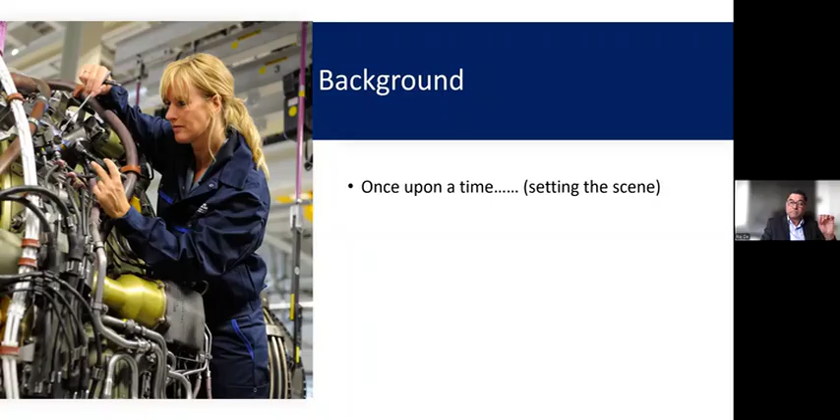The investigation found that as part of the maintenance, the engine borescope plugs were opened during the overnight maintenance activities. But post-maintenance, one of the plugs was not installed back and the other only partly installed. The borescope plugs are removed during, as some of you would know, some maintenance to inspect the internal parts of the engine as part of the engine health monitoring. The fitment of the borescope plug is certified not only by the engineer who has fitted it, but also by another engineer who is expected to do an independent inspection and then sign the certificate.

Now, here is the critical point. This task required an installation, an independent inspection, and a certification. All three occurred, yet the error still passed through the system. As a consequence, hot gases leaked during flight, causing heavy damage to the engine parts, causing significant disruption and thousands of pounds in repair of the damaged parts. So we must ask, did the risk control fail here? Or did the system fail to detect the failure of the risk control?

The subsequent investigation employed the HFACS and the MEDA taxonomies, but could not establish accurately the contributory factors for the human error. The conclusion was distraction of the engineers, and to address that, the MRO issued a high-vis jacket to all engineers that had a statement on the back, "Do not disturb, critical task in progress." This high-vis jacket was meant to be worn whenever an engineer is carrying out a critical task. Now, theoretically, this appeared to be a very good solution.

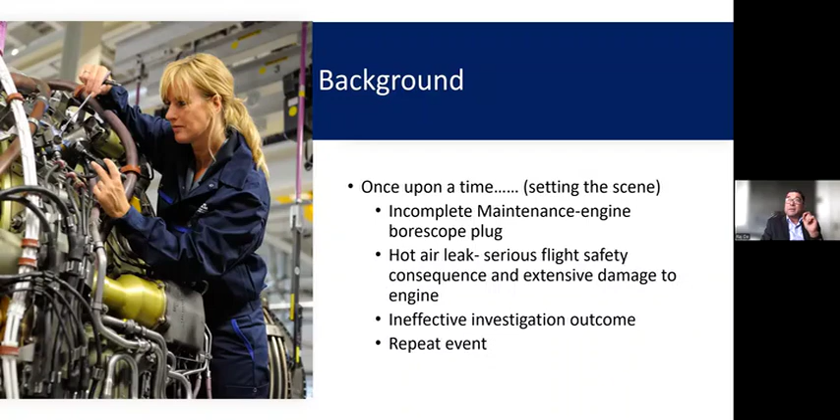The objective of this research was therefore threefold: trying to understand what are the causal factors for aircraft maintenance errors, how do organizational factors influence the effectiveness of the risk controls, and thirdly, in relation to the critical tasks, trying to find out how the risk controls can be made more effective. Importantly, not just identifying errors, but understanding why controls that should work don't always work in reality.

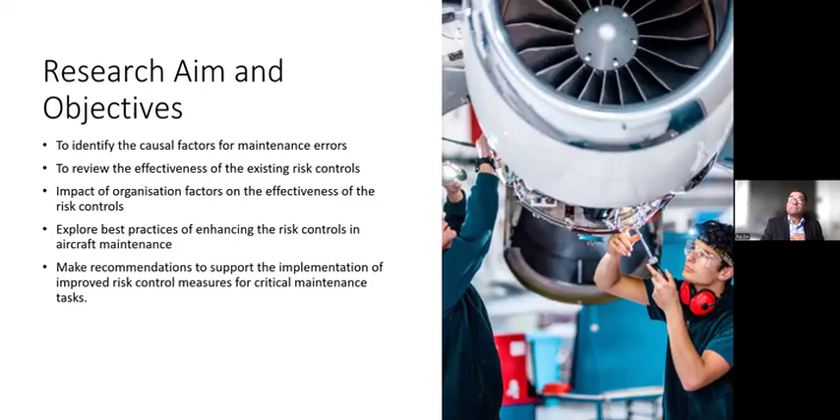To recap, the problem statements are as follows. I gave you one example, but there have been multiple events related to maintenance errors around critical tasks. I've seen key investigations which on one hand would be very limited. We all probably have heard the statement at the end of an investigation, the engineer was reminded about the duties and responsibilities. And on the other hand, the investigations remain inconclusive due to lack of information on what contributed towards a human error. This is due to memory fade. So investigations often are either too simplistic or inconclusive because of memory fade.

Now, maintenance errors are in this respect very unique because they often remain latent. They are only discovered later. In relation to critical tasks, we carry out hundreds of independent inspections throughout the year, but have very limited, if any, feedback on how effective these inspections are in error capture. On the other hand, there are very few useful mechanisms employed in organizations for identifying weaknesses in skills, and consequently, the continuation training structures in most organizations have very limited usefulness in enhancing the skills. Most of these continuation trainings are focused on enhancing knowledge, but not necessarily the skill behaviors or error patterns.

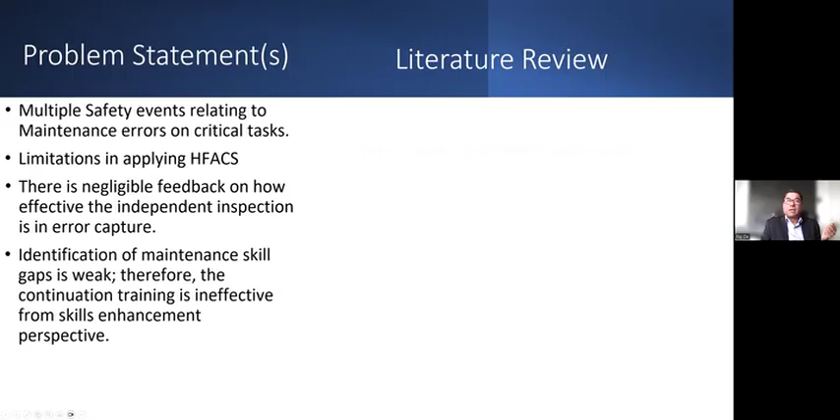My literature review for the research was focused on topics related to critical tasks in aircraft maintenance, regulatory framework, human factors contributors to maintenance errors, review of key safety investigations, error taxonomies in maintenance, risk controls in maintenance, organizational influence on risk control enhancement, integration of technological tools, lessons from flight data monitoring implementation, and also system perspective theories. So to recap from the example we have discussed, risk controls are in place, but we do not have any proactive feedback whether they actually work.

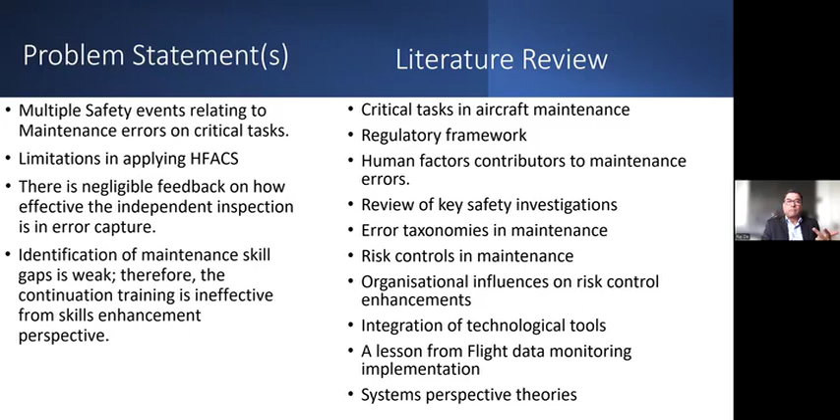The method was a multi-layered approach based on qualitative research. The data collection was interview-based with the logic of gathering richer information. The interview participants were selected keeping in view a good mix. Almost 50% were engineers with varying experience, and the remaining were a mix of managers and leaders of the company. Now, the question arises, why qualitative analysis? It was considered that human factors are quite complex in nature, and maintenance related issues are quite context driven. So they are not always measurable quantitatively.

The interview structure was broadly based on three themes. One was the causal factors of maintenance errors. The second was the influence of organizational factors on the risk controls. And thirdly, the views on present risk controls, their weaknesses, and recommendations for the future. NVivo software was used to help carry out thematic analysis, as it enables extracting data from different sources like interviews, audio and video files, helps construct codes and themes, and presents the output quite visually. In short, the thematic analysis allowed pattern recognition and revealed hidden relationships.

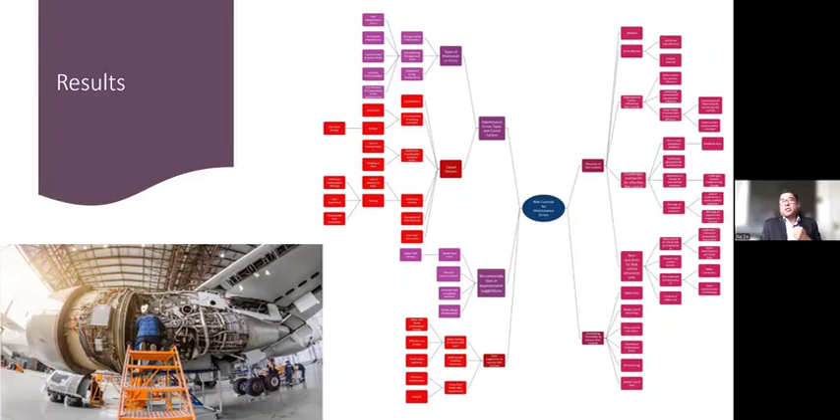Now this slide tries to summarize some of the key results from the research. Complacency figures high on the list at 33%, but other key observations were ineffective training, communications, and night shift timings. Notice that complacency is not negligence, it is a normalization of a routine. So a key message from this slide is that risk increases when tasks are repetitive in nature and errors may have no immediate consequence in the maintenance world, as in the topic we are discussing now.

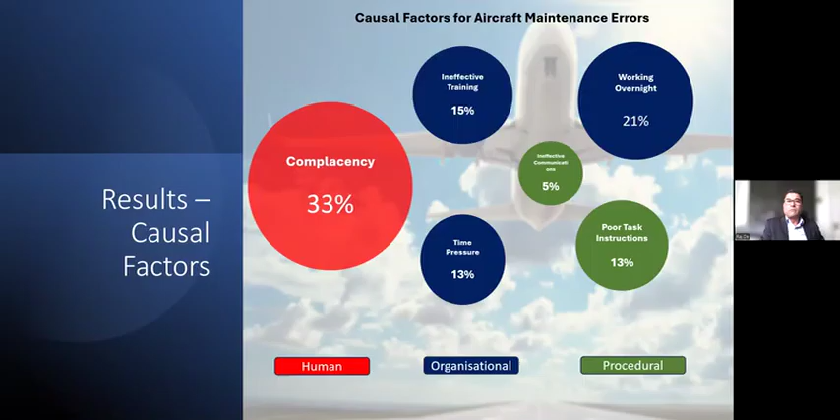So whereas mitigations like recruitment through the apprenticeship schemes have started to yield good results, the time to gain skill maturity is difficult to expedite. There is no shortcut to getting experience in a very short period of time. Along with the above, there is the issue of resistance to change. This factor affects the adoption of new technology.

So if you imagine we have people with greater experience of, let's say, 40 years doing this work, and on the other hand we have freshers who are trained, who have gone through the courses and the licensing system, with quite a young age profile. So there are different acceptance factors in relation to new technology.

In the previous slide, some causal factors mentioned were complacency, time pressure, and night shift duty times. Therefore, a key observation in the study was the over-reliance in some cases on another engineer's work, which could result in tasks getting certified without completion to their intent. In short, there is an assumed assurance: if it is signed, it must have been done, as was the case in the borescope plug example. Therefore, the observation was the possibility of a feedback error and the weakness of the error capture method of independent inspection.

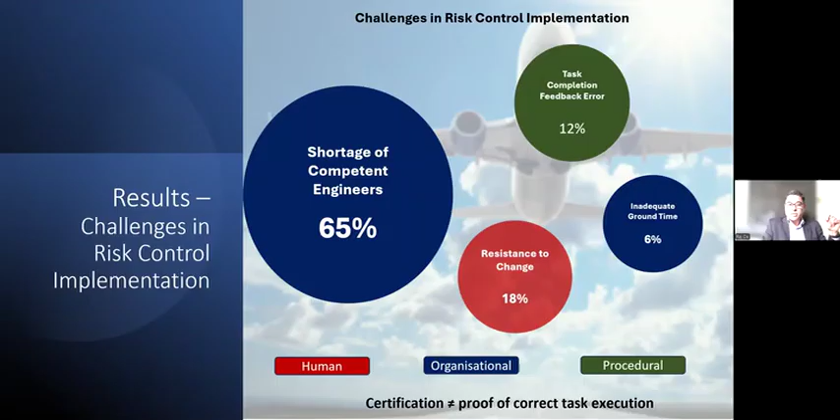So the research found similarities with some of the existing studies, like the types and causal factors for maintenance errors. It also observed the value added by the HFACS model, which has been derived from the Swiss cheese model, in understanding organizational factors. The model was also successfully applied for investigation in most of the operationally linked safety events. However, my study observed a fundamental weakness in the practical applicability of the model related to maintenance errors.

These errors are seldom detected at the point when the error is made. Rather, they come to light as a result of a flight safety incident or during a subsequent maintenance check. Due to memory fade, investigations are very seldom able to establish the actual reasons for unsafe acts. A key limitation identified, therefore, with traditional model applications such as HFACS is the reliance on retrospective identification of unsafe acts, which is particularly challenging in maintenance due to memory fade and delayed error detection.

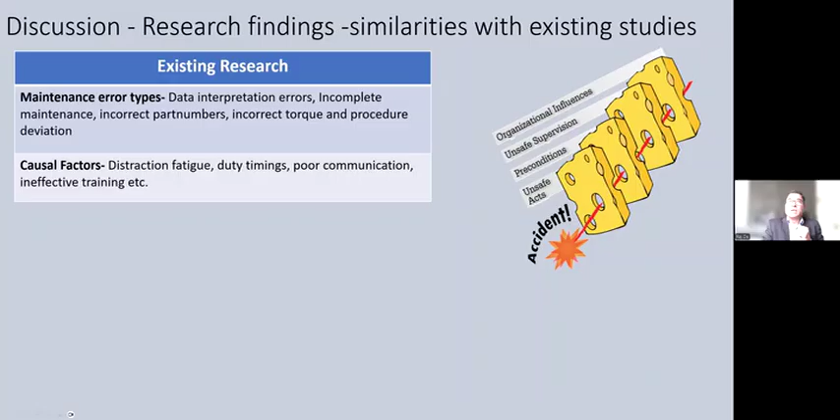To overcome this, the STAMP model was introduced as a complementary systems-based approach. STAMP, for those of you not conversant with the term, is System-Theoretic Accident Model and Processes. It's a systems-based approach, and STAMP views safety as an emergent property of effective control and feedback within a system, and suggests that accidents occur when control actions are inadequate or when feedback is missing or delayed. I'm not sure if you can see my cursor. So that's what in effect it says: if your feedback is good, your control actions are properly managed and controlled. It's the control process.

In this context of aircraft maintenance, this perspective is particularly relevant, as certification without meaningful task completion feedback represents a weak or broken feedback loop within the safety control structure. This systems perspective helped frame maintenance error not as an isolated human failure, but as a predictable outcome of inadequate feedback within the maintenance assurance system. So from a systems perspective, safety is maintained through continuous control and feedback rather than reliance on procedural risk barriers alone.

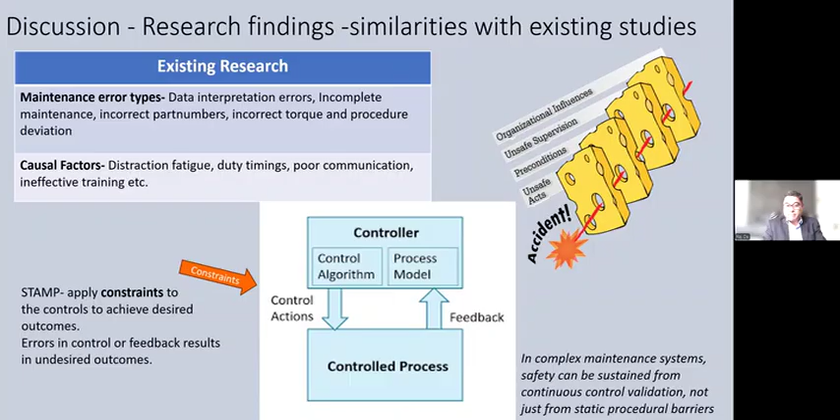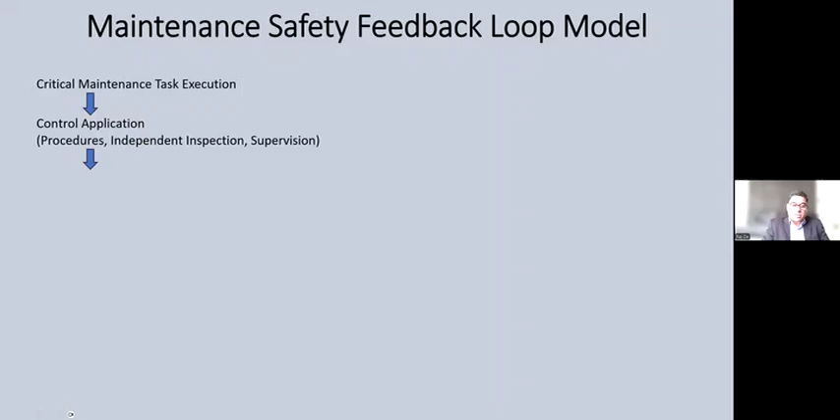To make the systems perspective from the previous slide more tangible, I've summarized it here as a simple feedback loop model within the maintenance context. On the left, we start with task execution. This is where the maintenance activity is physically carried out. This is supported by controls like procedures, independent inspection, and supervision. These controls lead to certification, which is how we currently confirm task completion. This is where the key issue lies. In the current system, there is limited quality feedback between certification and actual task outcome. We effectively assume if it is signed, it is complete.

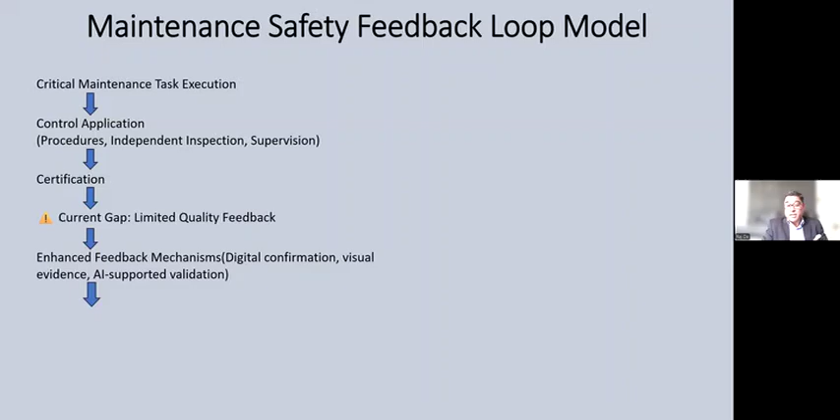The proposed model strengthens this by introducing enhanced feedback mechanisms such as digital confirmation, visual evidence, and data-driven or AI-supported insights. These mechanisms allow us to move to control validation. Not just was it signed, but was it done correctly? This validation generates meaningful feedback outputs, which feed into risk control improvements, targeted skill-based training, organizational learning, and importantly, the loop then feeds back into future task execution, as you can see on the screen.

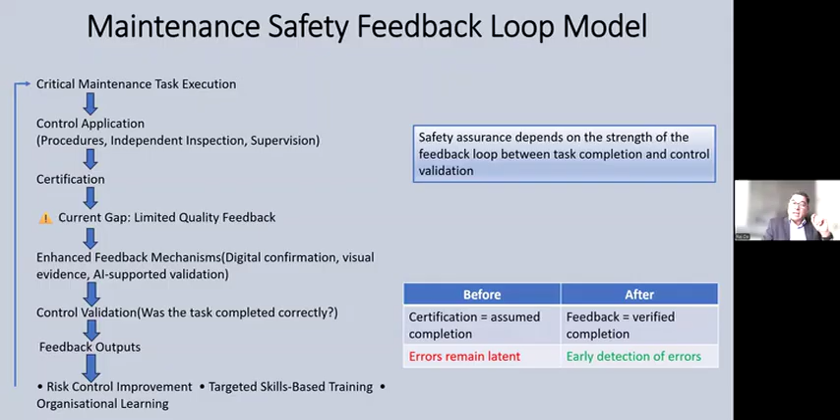So safety is no longer a one-time confirmation at certification. It becomes a continuously validated system of control and feedback. And if this feedback loop is weak, errors can remain latent, but if it is strong, we gain real visibility of control effectiveness, which leads directly into the key discussion points.

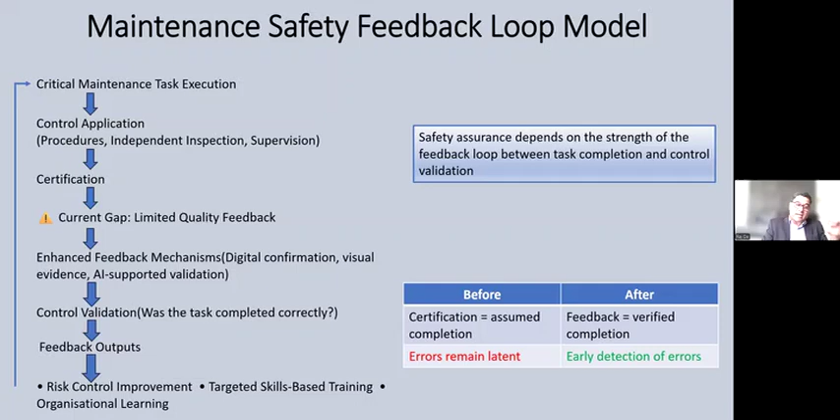These slides bring together the key discussion points from the research and explain why the current approach to maintenance assurance needs to evolve. The first key point relates to the post-COVID operating environment, which was a strong and consistent theme across most of the interviews. Organizations are facing a shortage of competent and experienced engineers, not just in terms of numbers, but in the depth of experience, as I mentioned before.

Many senior engineers have left the industry during COVID, and while recruitment and apprenticeship schemes are now recovering capacity, the skill maturity cannot be accelerated easily. As a result, tasks are increasingly being performed by less experienced engineers under higher workload, with greater reliance on procedures and supervision. This makes the effectiveness of task feedback and assurance mechanisms even more critical than before.

Secondly, it's the supply chain constraints. Alongside workforce challenges, supply chain constraints were highlighted as an operational pressure. Delays in parts availability increased time pressure, task fragmentation, shift handovers. These factors indirectly increase the risk of incomplete or improperly closed tasks, particularly on critical maintenance activities.

A central finding of this research is the inherent weakness in the way task completion is currently assured. Certification today is largely a binary outcome: signed, not signed. What is missing is quality feedback. How well was the task performed? Were there difficulties, deviations, or uncertainties? Did the independent inspection genuinely verify task intent?

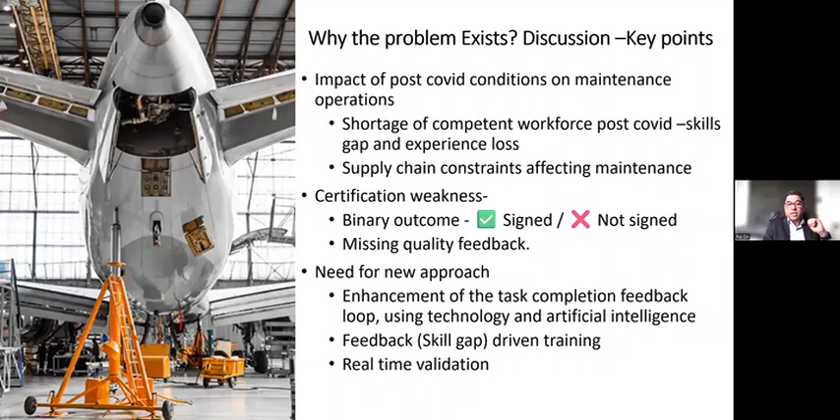In summary, the discussion highlights that the challenge is not the absence of control, but the absence of meaningful feedback on how well these controls perform in practice. This sets the foundation for the conclusions and the recommendations, which I'll cover next. I'll conclude by drawing together the key findings from this research and placing them in context of existing safety models

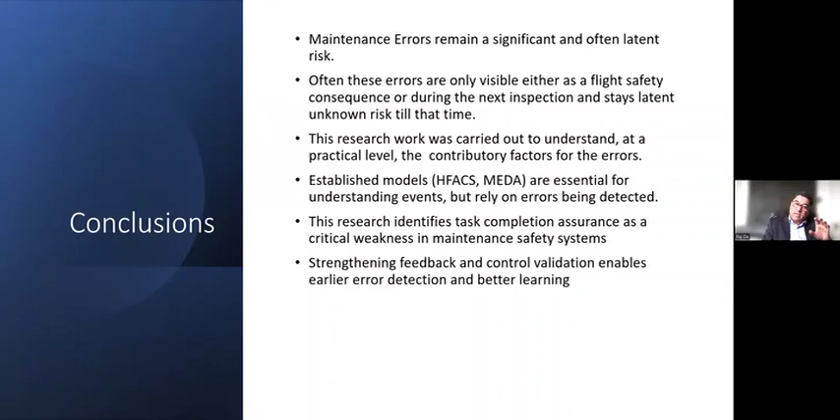and airworthiness assurance. Models such as HFACS, MEDA, and Reason's Swiss cheese model have made a significant contribution to aviation safety. They have helped the industry move beyond individual blame and understand organizational, supervisory, and environmental influences. These models remain highly valuable, particularly for event investigation, identifying systemic weaknesses, and informing safety management systems. This research does not challenge the value of these models. On the contrary, it reinforces their importance.

However, this study highlights a practical limitation when these models are applied to aircraft maintenance. Many maintenance errors are not detected at the time when they occur. They are only discovered later through a subsequent investigation, inspection, or a flight safety event. And by the time an investigation takes place, memory fade has already taken place. There is a lack of task-level evidence. There is limited feedback, which makes it difficult to reliably reconstruct the original unsafe act.

As a result, even well-established models can struggle to explain why a task was certified as complete, whereas in fact it was incomplete. So the central finding of this research is that task completion assurance is a weak point in the maintenance safety system. Certification and independent inspection provide a declaration of completion, but often there is no confirmation of task quality or task intent. This allows errors to pass through existing controls and they remain latent within the system.

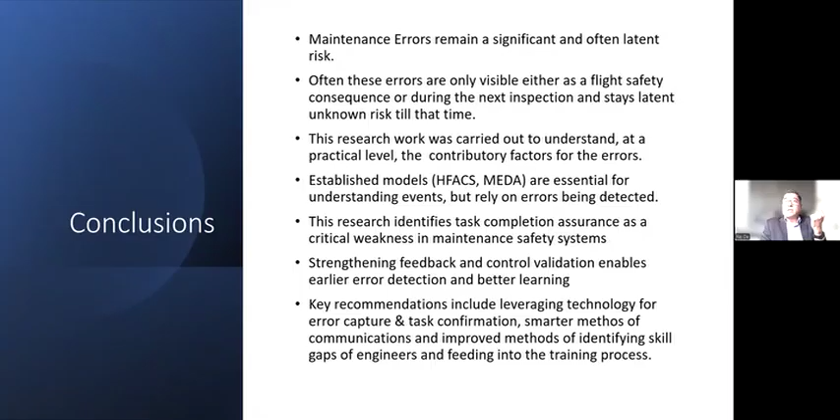This brings me to the last slide with a final thought. In conclusion, this research suggests that the future of maintenance safety lies not in doing more inspections or adding more procedures, but in knowing with confidence that critical tasks have been completed as intended.

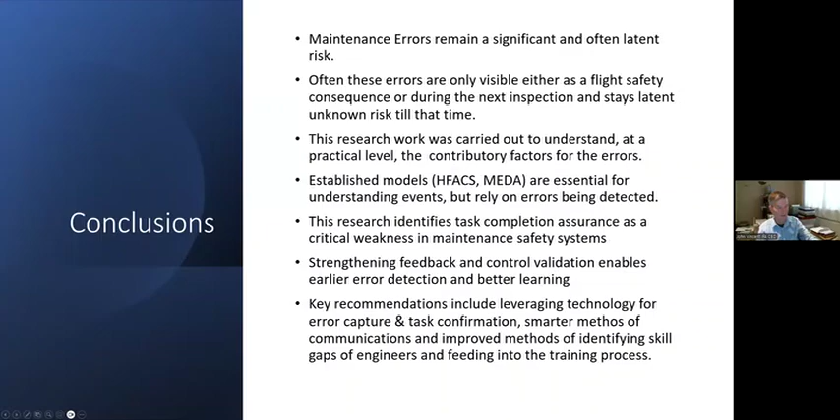Thank you very much, Raj. That was excellent, and I think you very clearly expressed your findings. Well, you have a round of applause there from everybody who's online. Certainly, there's a question in the chat at the moment. So if you'd like to have a look at the chat, you might like to address that question first.

Sure. Okay. There's a link, John, which you have posted, which I'm not sure what that relates to. It says this needs updating. Is that from yourself? Oh yeah, that was a paper that was published some time ago by the Aeronautical Society on human factors in this area. But bypass what I put on there, and I think there's a question from Tom Deacon. Tom, you might like to express the question yourself. Please go ahead, Tom.

Hiya, can you hear me? Yes, I can. Perfect.

So I was just thinking that as engineers, a common psychology thing is system one thinking and system two thinking, what's conscious and what's not conscious. Quite often, when I drive home, I don't think about driving, I just drive. And sometimes it's the same with aircraft maintenance. It shouldn't be that we slip into system one, but it is completely human nature. It's normal behaviour. We're not aware of it.

So when you talked earlier in the slides about memory fade, I think it might not be that the memories fade. It's just we were never conscious of it in the first place. We don't know the reasons why. We just slipped into autopilot, and we were subconscious of our mistake. So I completely agree with the recording of media, using glasses with cameras built in to detect that you've left a borescope plug off, because you might not even be aware of it.